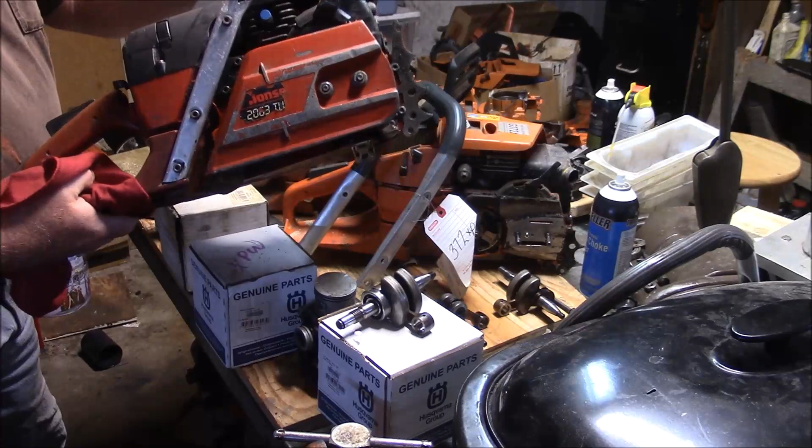I've always wanted a small mount version, and Bob provided me the holy grail of that whole 372 chassis series saw, the 2063 Jonsered. Does that sound confusing? Well, it shouldn't if you follow the channel, because you should recognize that the fundamentals of the Jonsered 70 series of saws, the 2063 through 2071 all the way up to the 2172, are all derivatives of the 372 Husqvarna designs.

Now, the second thing is I'm going to have to do this in fits and starts, because I've been quite ill for several weeks. Coming out the other end of that, I realized life can't stop, you got to continue. So this is also the beginning of my summer season with chainsaws as well.

We have a couple of themes here. One I'm not going to bellyache about, and that's the recovery. The second is reviewing the whole 372 class of saws. Now I've done this, but my God, it's spread over so many videos that it's almost impossible for people to dig through and find the relevant bits and pieces.

I may go back into the archives, because I've got photographs and videos of just about every single iteration of Husqvarna 372 and Jonsered comparable models that existed, except for two. I've got both the ones I missed here on the table today. Like I said, one was the small mount version, in this case the 2063, and the other was an original 371 in its original form.

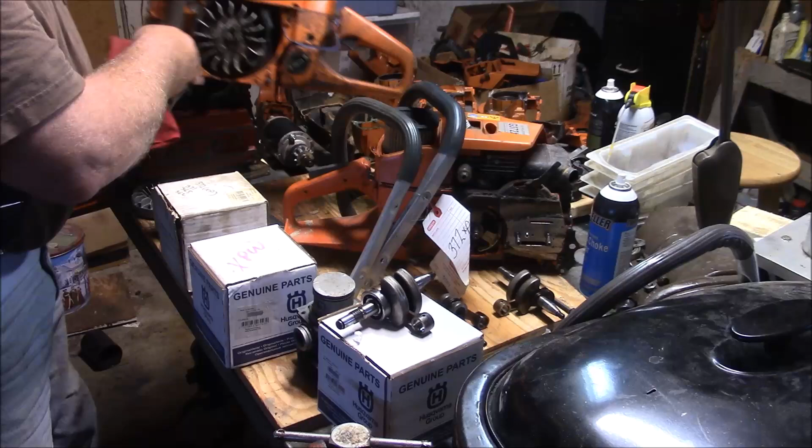Another thing that the 371 had that the 372 didn't was a single ring piston versus the double ring pistons, which came fairly quickly after. Here's a 371 piston with a single ring, and this is what the 372 had. They blended - there's some early 372s that had that single ring and all that. I'm not going to get into the serial numbers, just general concepts here. But that's a 371 single ring, and this is a 372 where they added a second ring.

I don't know if you can see some other differences from the Hilltop Saw Shop world. The observant ones will figure that out, the other ones won't. That whole 372 class saw progressed, making changes - they evolved, different ignition here, different carburetor there. One of the things that evolved also was the crankshafts, but I'll get into that a little bit later. Eventually the 372 came to an end as a US sold product somewhere around 2009, 2010.

A completely new design saw hit the marketplace, called the 372 XP. Well, wait a minute, it has the same number as the 372 XP the year before, but as I've said over and over again, it's a completely different saw design, and it's really hard to argue that they're the same saw. It was a different design pretty much from the cases up, and the heart of the new design was this basic cylinder right here, which was a completely different cylinder design than the original 372, 371 series. The differences are rather significant.

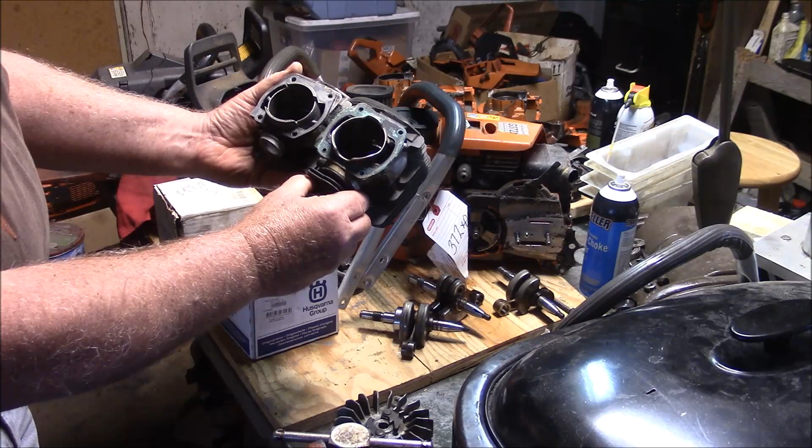Oh, I got a doctor's appointment.

Basically what you have in mind is the first group of saws above that line are original edition, and that would be the 371 that would turn into a 372 with a case change, a piston change, and a few other things like the flywheel. Details don't matter. And then that chassis spawned a 362, 365 Special, and then 372 XP, right?

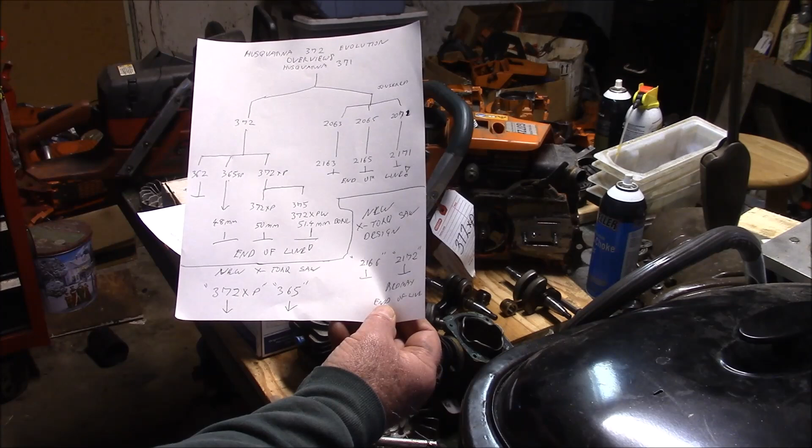And really the 362 was kind of an oddball deal. It had a small mount versus large mount cases, but it also had an open port versus a closed port cylinder. And then the 365 Special was the 48 millimeter top end that I know and love.

I did a saw on that a couple years back. Love those top ends. They're closed port, meant for a little bit lower RPM. And in the conventional logic, that means something bad. In fact, it turns out to be good.

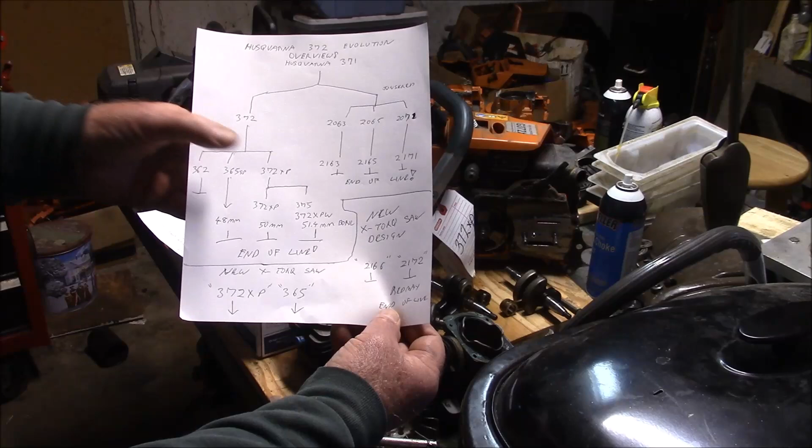And of course, the standard original edition 372 50 millimeter top end. And then they had another version. It started out being called the 375, and they quickly changed that to a 372 XPW.

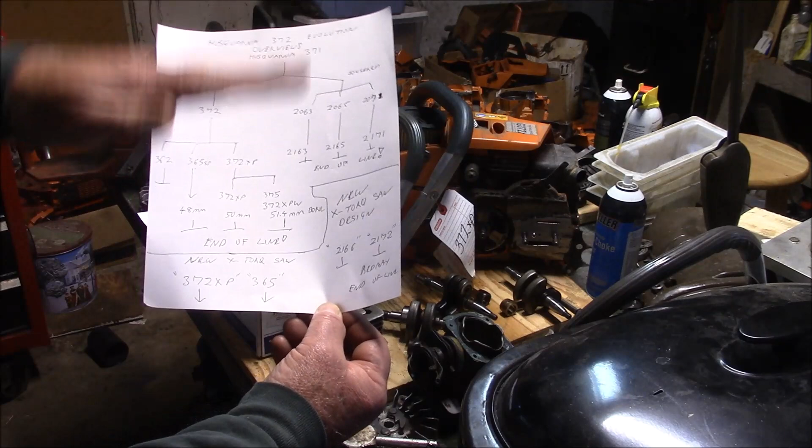Instead of 50 millimeter, it was a 51.4 millimeter bore top end, closed port, but it had restricted transfers to bring the RPMs down. And again, if you go by online logic, that's a bad thing. I've gone through that enough for you guys to realize it's not. It's just moving the power band based on the cross-sectional area of the transfers.

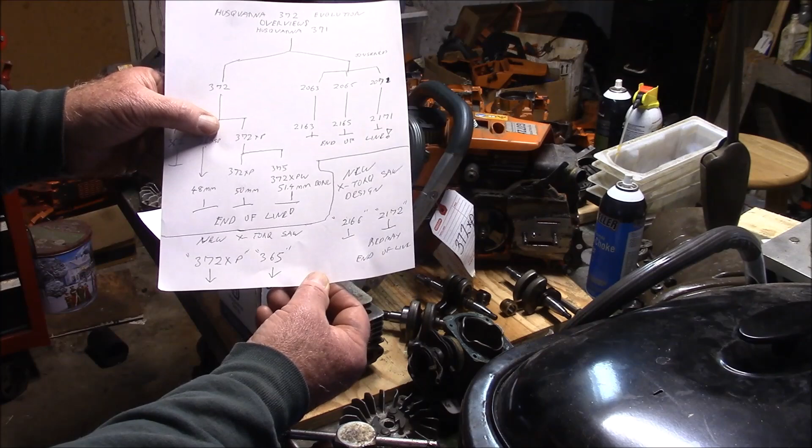Now, while the Husqvarna line laid out something like that, there were some variations. For example, there were low top versions of the 372 sold more overseas, and then there's high top versions. And of course the XPW was supposed to be for the more West Coast longer bar types—more bore, more torque, longer bar, not quite as many RPMs, but enough.

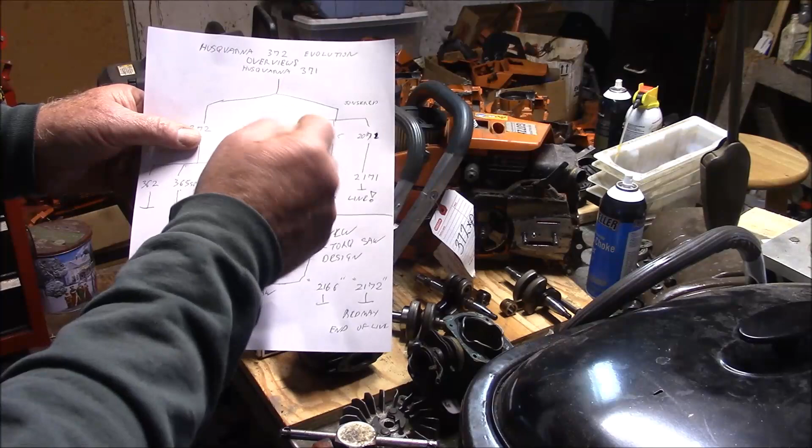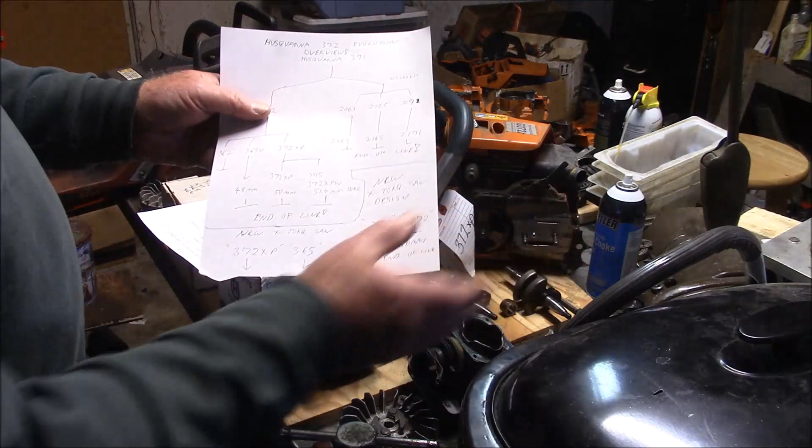But alongside the Husky line, then you had the Jonsered line, and you had the 2063, which is what this is. And like the 362, it has a little smaller bore, and I'm not sure yet if that cylinder is open or closed port, but it's different. The big difference between the 2063 and the other versions of that saw is small mount bar versus large mount bar. And of course the 2065, 2071, and that evolved into the 21 series.

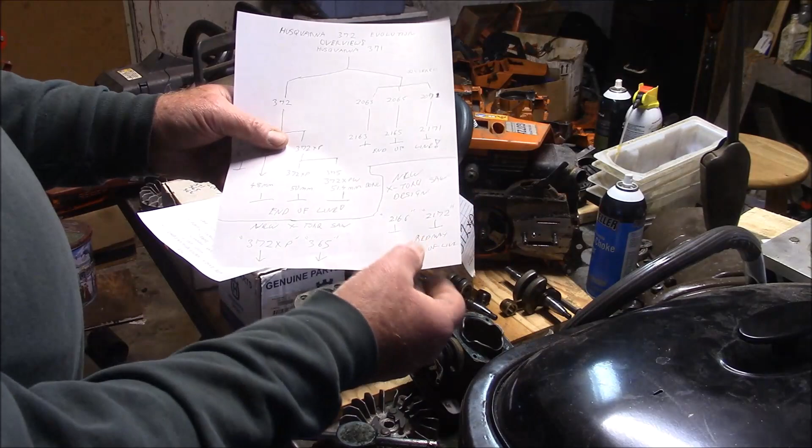And in particular, we did a 2165 on the channel, and we've done 2171s as well. For that matter, I called it a 2175 because I put a 51.4 XPW top end on a 2171 bottom end. Those were all original edition.

I'll go through this several times, and I already have. My God, I've got video after video doing that. It was just what my son pointed out—I can't go back and pinpoint them because I usually have these longer videos, and all that information is buried in there somewhere.

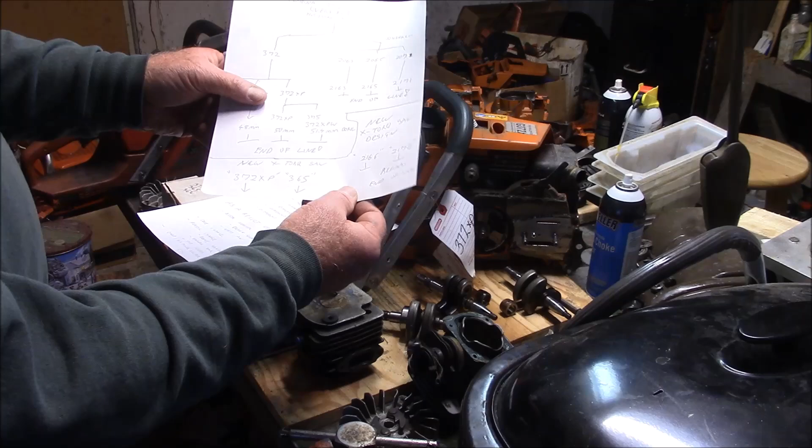So right around 2009, a new design came out. It was called the X-Torq. And as I was showing before, instead of the original edition style cylinder, you got this thing right here. It's just all different. There's a lot of parts interchangeability if you're clever, but you really have to know what you're doing.

So this is the X-Torq cylinder. It's obviously quite a bit different than the original edition 50 millimeter. It's also 50 millimeter, but it's all different, you know. You've got more fin area. It's taller by half an inch.

The location of the decomp is different. There's just all kinds of differences. And the big thing with the intake—you have a completely different casting for the intake side. You've got the strato ports, and you have a different layout for transfers. You've got caps on the cylinder versus no caps. About the only thing that's the same is the pattern on the bottom of the cylinder, so it'll sit on the cases, and the muffler.

It's about the only thing that's the same. Pretty much everything else is different with the X-Torq. So I don't really consider that the same saw. It's a different saw.

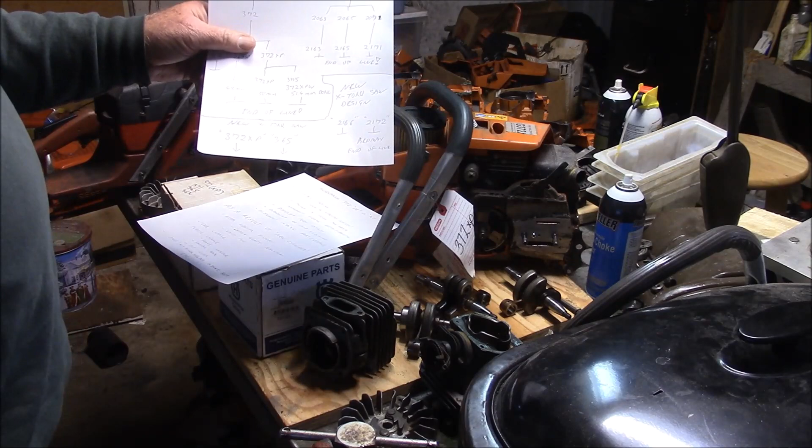Now, because this is a completely different design, really, they had to make some substantial changes. So the new design required some substantial changes. It retained the model number from the original edition saw, but it's a completely different design.

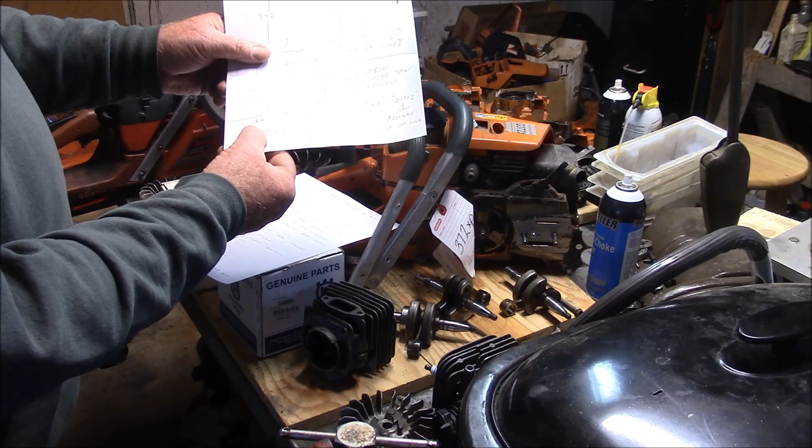And the 365, I think they dropped the special designation, they just call it a 365. But basically, these two saws are virtually identical. The only real difference between the X-Torq 365 and 372 is the cap, where they restricted the flow in the transfer port, and some plastic. Basically, the 365 is a low top configuration, where the 372 sold in the States was all high tops. Between the transfer caps being restricted and having a somewhat restricted intake because of the smaller air filter and smaller top cover, the 365 made a little bit less power. Not that many people would notice, but it does.

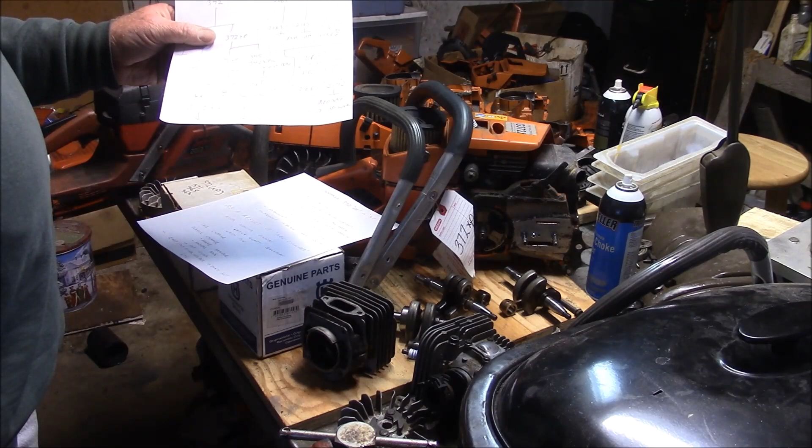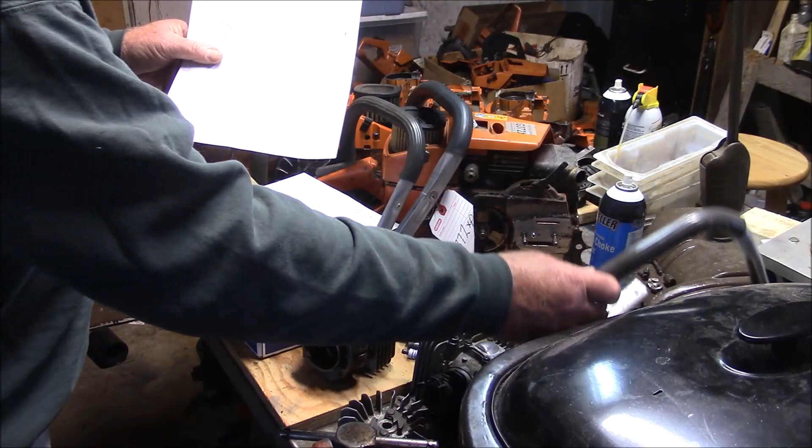Now, the Jonsereds are all low tops, so they were the same as a 365. The air filters are the same, everything else. But they had completely different plastic. I did a video on that once before. And while the cases and all the hard parts swap between the two brands, because of the pull start, the angle of the handlebar and stuff like that, things like the tank handle, the top covers and the handlebar are pretty much unique to Jonsered. They have the 2166, the 2172. Jonsered went out of business, turned to Red Max.

On the Husqvarna side, they actually came up with another set of cases, a bunch of more improvements. And then while the 372 X-Torq had a pretty rocky start, we'll get into that another time, the new ones are pretty solid. They've debugged them to the point where if you buy one of those, it's a good non-auto-tuned 70cc pro-level saw, and you won't have any problem with it. Same with the 365. So that's an overview of the models.

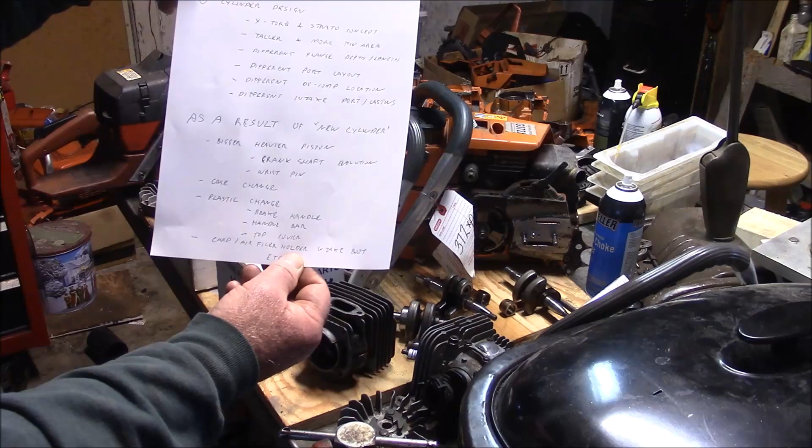Doing this because I'm getting old. Because of the cylinder design, I'm just going to show this picture up here. These are some of the differences. But because of the different cylinder design, they had to make a lot of, I think, rather substantial changes to the saw.

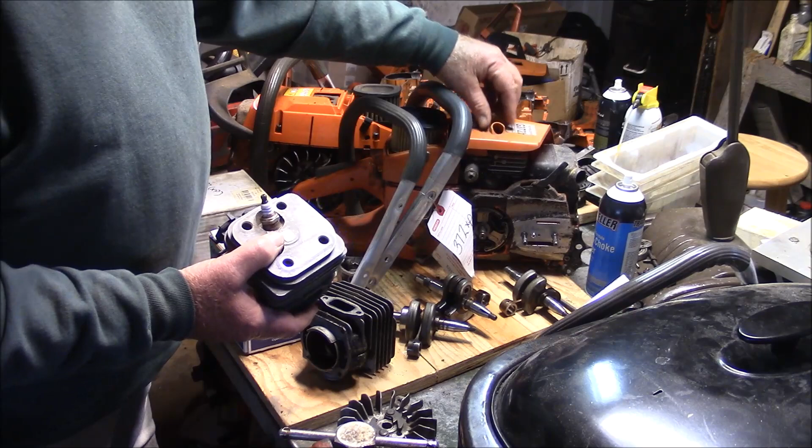Again, it's taller. So since the cylinder itself is taller, the top cover had to be changed. They added like a half inch to it. Since the decomp had this top location, they had to add this little dimple up here. So that top cover, you put it on an original edition, you got a lot more space on top of the fins. Oh, gotta go.

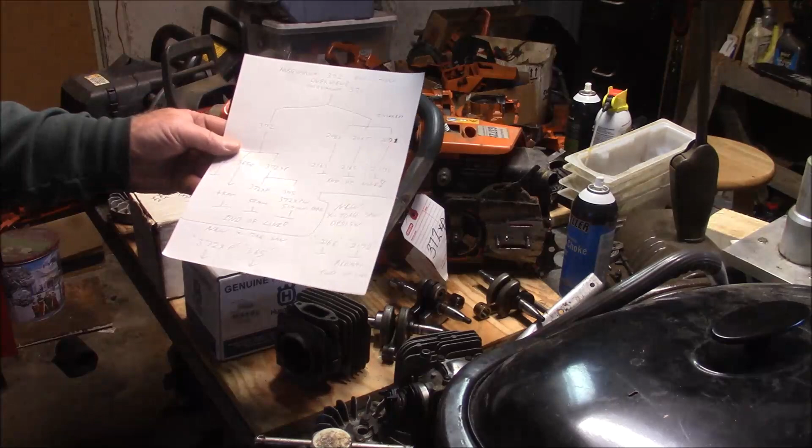So back again, and the quick overview of this is, again, the Husqvarna family tree, which started with a 371 turned 372. 372 was broken to a 362 small mount, 365 special that had low top, 48 millimeter cylinder, and a few other changes. And then the 372 XP, which had the 50 millimeter cylinder like this. This is a 50 millimeter 372. And I think I showed you before that there were some differences between 371 and 372. Things like a single ring piston on the 371 to the double ring piston 50 millimeter on 372. And then you had the XPW, which was a

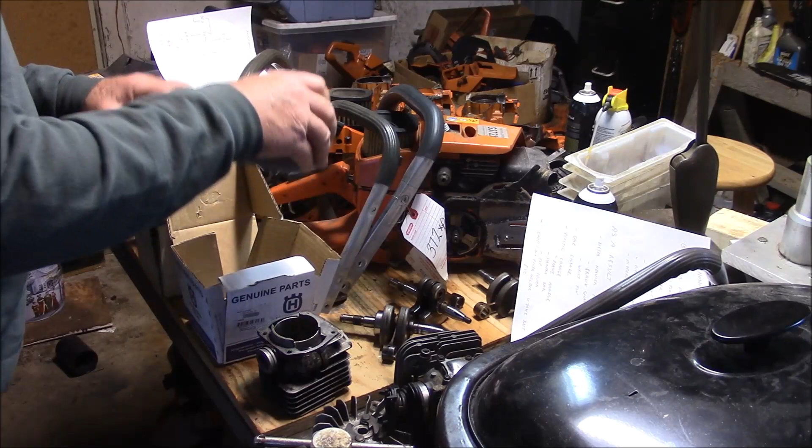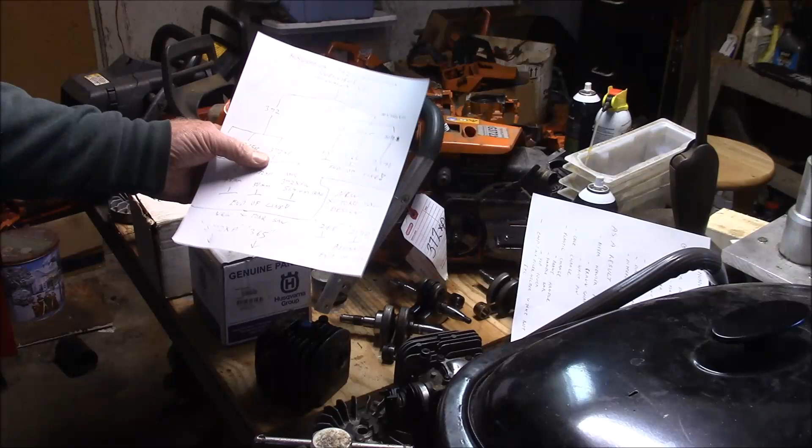51.4 millimeter cylinder with a slightly closed off transfer to bring the RPMs down. So you can see the difference in the bore and the transfers, right? So we covered that, and I've done that many times over the years in the videos. Still original edition, so I prefer them. And the other thing is the 365, I did a video on that one showing it also had smaller transfers than the 372 50 millimeter XP cylinder. This one here had the largest transfers of all of them, the original editions, and is probably the best top end to build with. For most people, starting with one of these is probably the best way to go.

And then it all changed. 2009, 2010, the original edition, both from Husqvarna and from Jonsered, came to an end. And a whole new cylinder was designed, and they didn't change the model number, so a 372 XP, most people don't realize that they have a completely different saw if they have a 2010 through now versus the original edition. They bought them, they expected the same kind of a saw, and the fact was it was a different design from the get-go. Because of the different cylinder design, there's a lot of things that got changed on the saw.

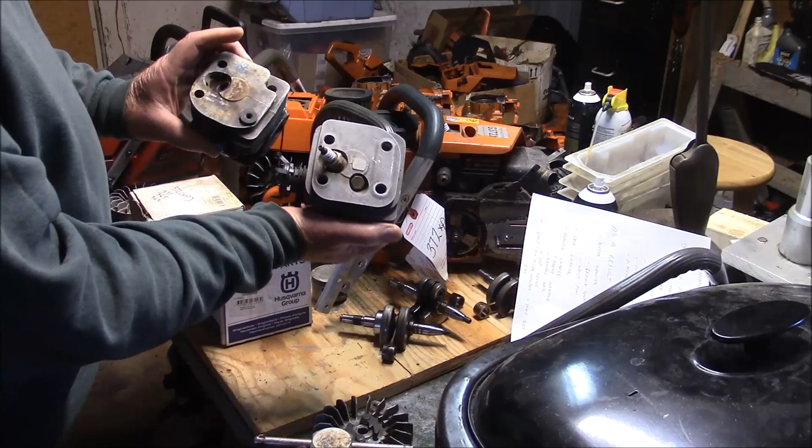It's taller. It's got more fins, so it's heavier. Completely different intake. It has additional passages for the straddle ports. And the cross-sectional area of the transfers are, I don't know, somewhat less. So they rev at a slower RPM.

One of the reasons, as an aside, that I like going the XPW top end on the X-Torq lower units, the X-Torq bottom ends, is because both of them have a little bit larger piston and both of them run a little bit lower RPM. These here, the way they're set up, they like to run around 13,000 RPMs no load. I guess the spec is 13.3. Whereas this design right here with the larger transfers is like 13,500 versus the 13,300 on the X-Torq. They just simply like to rev more. Now understand, no load is a reference for tuning, it's not time in cut. But because of this completely different cylinder, just the entire saw had to be changed in order to accommodate that design.

Everything from the cover being taller, the handle being taller, the chain brake handle being taller, all this stuff had to accommodate the taller cylinder. And while you could retro a lot of the X-Torq parts back to the original edition, there are certain things on the original edition you can't retro forward to the X-Torqs. One very subtle thing is when they went to X-Torq, they had to change the casting of the cases right here because this flange is longer on the X-Torq than on the original edition by quite a bit. I don't know if the camera will show, but you're looking at 100 thousandths or more. So while you can put the original edition cylinder on the newer X-Torq cases, you really can't put these on the original edition cases unless you take back some of this material to make clearance so it can sit inside the case.

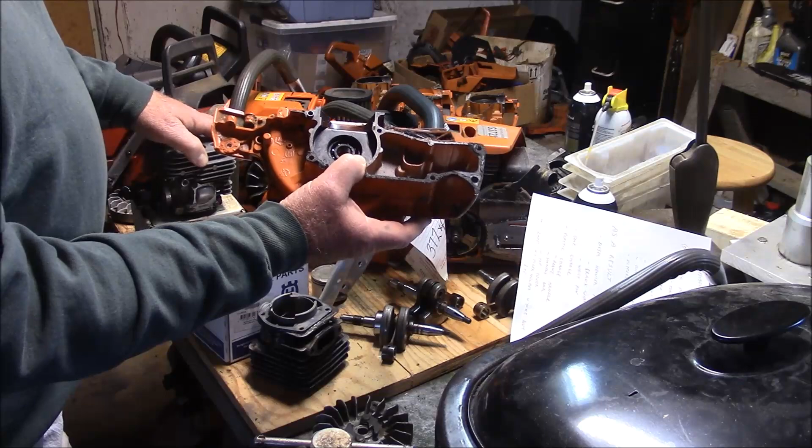Because otherwise the flange will interfere with the bottom here on the original edition cases. So the cases are different between the original edition saws and the X-Torq saws. Although if you buy a set of cases for original edition saws now, you're going to get the X-Torq cases because they retro back. So that's a very subtle thing.

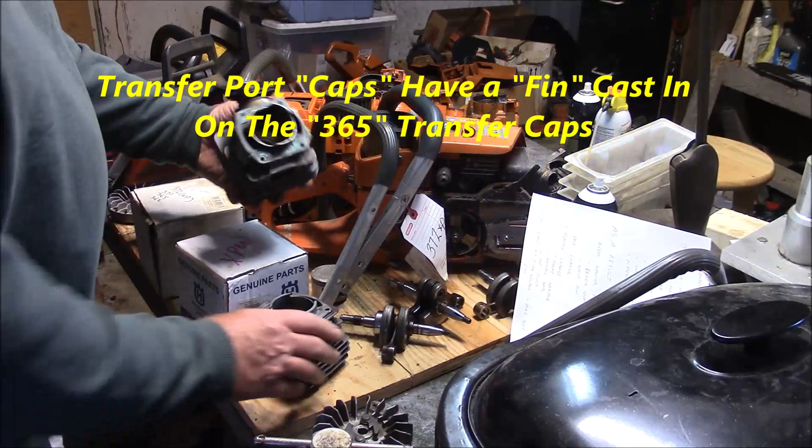And the discussion can go in a million different ways. I already mentioned the difference between the 372 and the 365 is the transfer ports, high top versus low top, and stuff like that. But there are a lot of other things that happened with this design change that's not readily obvious. We talked about the top cover, the handle, the chain brake, and all the things related to the intake, because it's a different carburetor intake boot, filter holder, and things like that.

But we didn't talk about the crankshaft. One of the things Husqvarna had to deal with is the fact that with a new cylinder, you have a heavier piston. So now the entire balance of the crank and bottom end is different because you have more weight sitting right here. And some of the earlier X-Torques had that PTO side bearing issue.

Some of it was related simply to people revving them high, trying to make them sound like the older versions. And no matter what you did to the tuning screw, you could never make the X-Torques rev as high as the standard 372 XP original edition. Just simply couldn't do it. Number one, because the ignition systems on the X-Torques were rev limited to 13.3, where the ignition systems on the original edition were 13.5 or higher. So that sound was going to be different simply because the RPMs were going to be different.

As an aside, one of the things that used to create problems for dealers was a person who got the adjustment tool for the carburetor and would keep trying to lean out the X-Torques to make it spin like an original edition. Eventually that creates problems, you know? We found pretty much early on that if you set these to about 13,000 RPMs no load, the X-Torques, even the early ones, lasted pretty well if you brought the RPMs down. I think it was a variety of factors, but one of the key issues is just having that additional mass as a piston beating on the bottom end.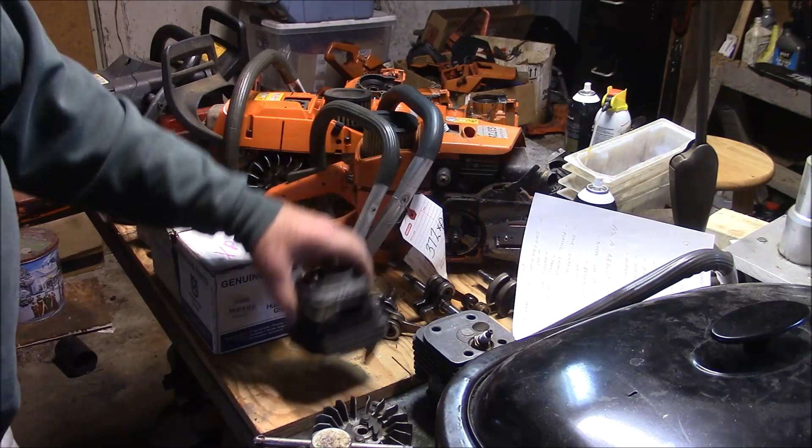So, was it an improvement? I don't know. They do run good, no doubt.

I would say that the X-Torque is a great way to start if you want to modify saws, because you've got the caps. Remember, you have caps that you can take off, whereas the old ones here, you had to get a fairly sophisticated die grinder to get in there on those transfer ports, where this right here you can just work right from the sides. So these, I think, are easier to modify.

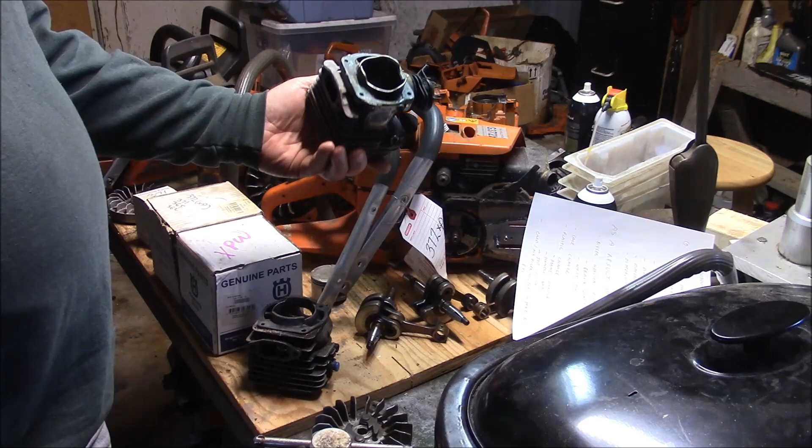And like them or not, these damn things can run. Do the right kind of things to these, they just freaking run.

So that's an overview of the lineage, the models, an overview between original edition and X-Torque.

We're going to do that several times in several different ways. And as I get into future videos, I'm going to drill down on things like the differences in the crankshafts and the differences in the cases. In fact, I've done that in the past. Suffice to say that these are what they sell now, number one.

There's a gazillion of them out there, number two. There's an awful lot of people who got rid of these top ends for original edition top ends when you did conversions, and that created a whole new set of problems, by the way. So these are a little bit easier to work with, I think.

By the way, one of the issues I've seen a gazillion times: one of the things that happens is you put an original edition cylinder in place of one of these. There's a lot of space underneath that top cover now. The cooling is not quite as good because the air just goes right over the top as compared to being forced through the fins. And there's less fins to begin with.

So in the northern climates it doesn't matter so much. In the southern climates you might want to think about that twice.

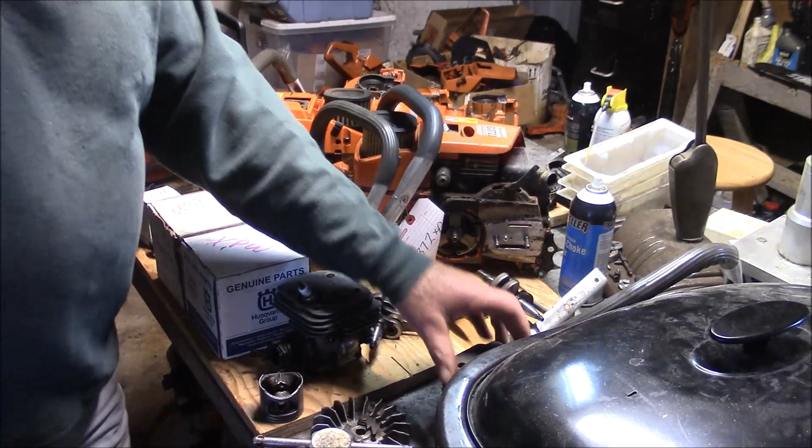One of the modifications I like to do on these is modify the intake boot and put an X-Torque carburetor on it. I've done that a bunch of times, you've seen it in the videos. It actually works. You've got to sort of clean up the intake port and cut that, like I said before. So there's just a lot of really simple things a person can do to make those run stronger if you want to.

Not going to get into that. I've covered most of what I want to do, but to those guys who are going to make them spin, there's a few of you guys out there who are discovering the 372 for the first time, it sounds like, on the videos. I'm going to caution you.

Careful with the crank. Pick the right crank. Learn a little bit about what's out there, and absolutely avoid the aftermarket cranks. Make sure that you get one of the later cranks.

You can see right here the slight changes. Get one of the later 372 X-Torq cranks if you're going to modify an X-Torq cylinder to make it run more RPMs. You want to really pay attention to that balance.

If you're starting with a later model saw, like 2016, '17 and later, it's a non-issue. But if you got one of the earlier X-Torques, like the 2010 through '14, you might want to consider finding a late model crank, used or new. I think you'll find that's going to serve you better, especially if you put on an unlimited ignition and start trying to get higher RPMs out of your saw.

Now, along with all this stuff, one of the big differences between the X-Torques and the older saws is the ignition system, and this is something that's overlooked. The first generation of those saws had troubles, they had a hard time getting them started. And they came up with an ignition system, I don't know, somewhere around 2016 or '17, where it actually started creating spark at a much lower RPM, plus a slightly different timing curve.

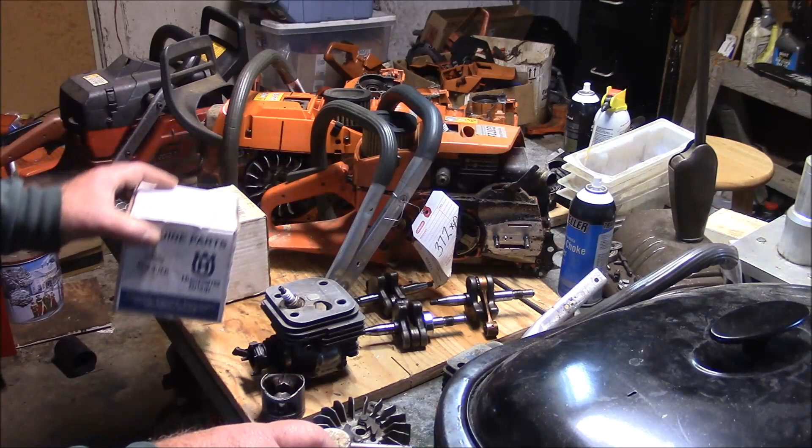If I'm going to go back to an original edition and I don't want to make major changes to a saw, and I've got a late model X-Torq, these cylinders, the XPWs and the 48 millimeters, like I did a couple years back, they really suit the chassis because of that ignition system, and also because this one here also has a little bit larger piston, so it balances well on the X-Torq crank.

And in the wrist pin and stuff like that, it's a nice balance, and the cylinder, because of the smaller cross-sectional area of the transfers, matches up really nice to the ignition system.

Now, the real horsepower guys don't care about that, but the rest of us do. So you can bring one of the X-Torques back to original edition and end up with a nice running saw. And I would get rid of the cover. There's a lot of options out there, either Chinese or used OEM, to bring that cover down so you don't lose the cooling capability. You want to force the air through the fins instead of having it go over the top. Stuff like that you've got to consider.

Now I'm getting off into the weeds, getting new parts to go on the original edition saws. I don't have a problem having the taller handle on the original edition 372. That works fine. The only part I really have a problem with is the top cover, like I said, because of the clearance over the cylinder for cooling. Pretty much everything else is fine - a little taller chain brake paddle, who cares? A taller handle gives me more room when I have a glove on. Actually, it's not a bad thing.

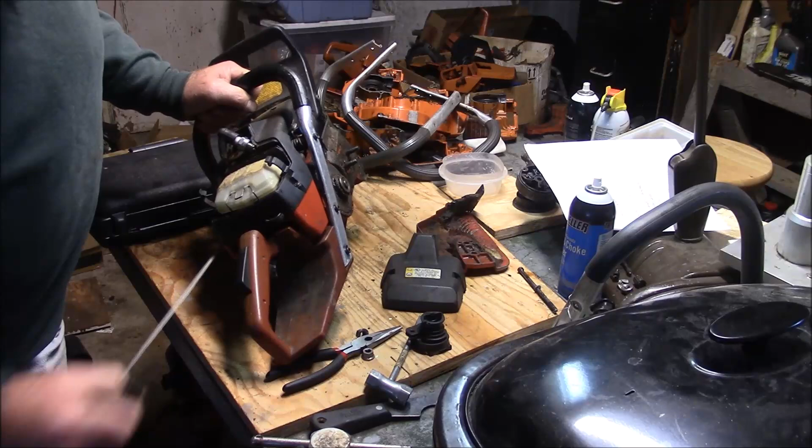Let's find out whether or not we have a saw that we can turn into a running saw right here. This was given to me by Bob - this is to fill a hole in my collection. This is a small mount 2063 Jonsered. But the first thing I need to know is, does it have spark? Isn't that a good start? Let's see if we have spark. We do have spark. The next thing is, do we have compression?

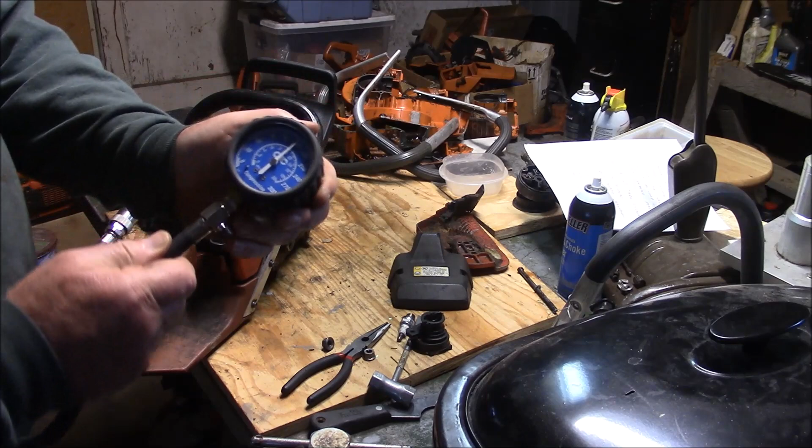Look at that, we got up around 150. I don't know if the camera will pick that up, but I measured 150 pounds of compression plus spark.

Why won't this saw run? I think it's going to run. So the next thing we need to do is, you got compression and spark. We need air, which goes to this air filter, and then we need gas. So there needs to be some in the tank. Alright, got a little bit of gas in there.

Now, to those people who don't like primer bulbs, boo on you, because this is where the primer bulb would make a big difference, because by priming that you could make sure the gas is into the carburetor. Guaranteed that thing is dry as a bone in there, and even while I choke it, the chances of me being able to draw gas up and get that wet fast is probably pretty slim.

So let me see if I got a few drips left to go right into the carburetor. Yeah, there's some. We'll see if that helps to get started. Maybe enough RPMs it'll maybe start drawing. So let's see if we have a saw. Come over here and decomp, because I'm old. Probably don't need that much gas in there, but maybe we do. Fired.

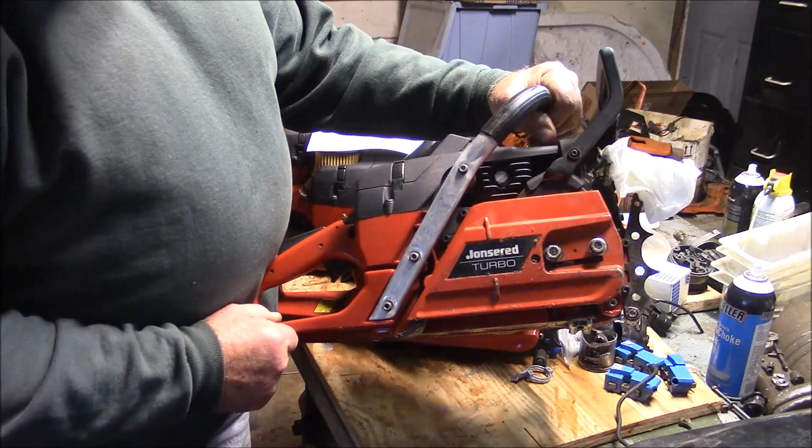So let me see. See if my little... yeah, you know, 372, 370... Oh yep, Jonsered. What we have here is a 2171. Looks pretty much like the other ones, doesn't it? This one here, I call it a 2175 because it has the Husqvarna XPW top end on it. It's a 51.4 millimeter versus the standard 50 millimeter.

And it has a different ignition. Can't you see it? Should be clear as day. We'll get into that. But this one has the later version of the ignition system that are on the new X-Torques, and it starts a lot better once I made that modification. Other than that, this is a relatively unmodified saw. It just simply has the 51.4 millimeter top end, but it has a standard carburetor, muffler, X-Torque ignition, but the rest of it is pretty, you know, pretty generic.

This is a stock 2172. And remember we were talking about the differences between the X-Torque saws and the original edition. Well, you can see it right here if you look careful. See how much taller that chain brake is versus the original edition? Same with the handle, same with the top cover. You know, there's a little more space right here, a little taller. And notice it has a decomp up here because of that different cylinder design as well.

So this one here is also relatively stock, in the sense that the only change I made on this is I popped out those goofy nylon bearings and stuck in steel cage, and I put it together with a glue gasket versus a standard gasket. Other than that, this is stock. Good running saw. You've seen it many times in the video.

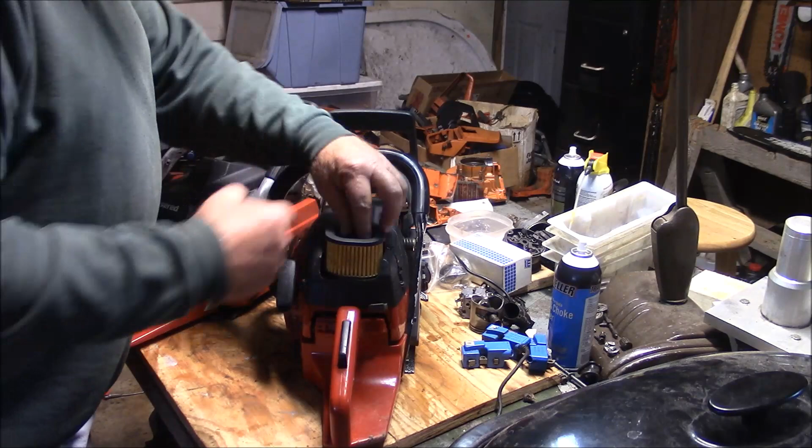But this is a case of blending the later X-Torque parts back to an original edition and coming up with something that's a blend of both that's better than either one, in my humble opinion.

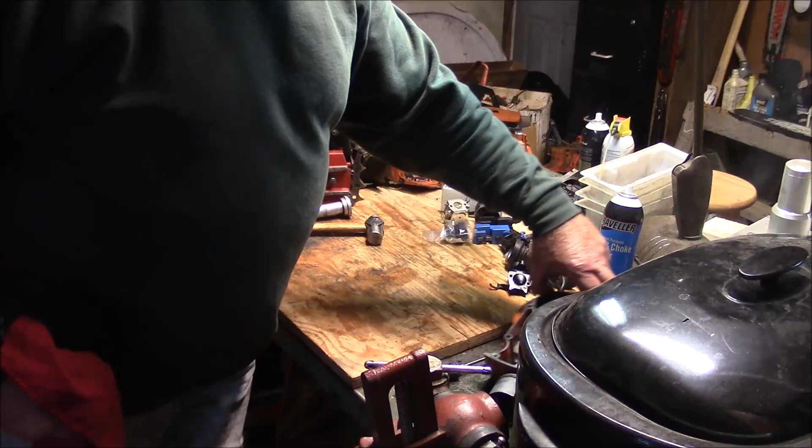You might ask how come I'm going back and reviewing all this stuff. Well, I kind of had a rude wake-up call a little while back when my son came home and basically told me that all my videos suck. So I went back and started reflecting on that a little bit, and then realized that while I was doing a whole bunch of these videos about just living life, I really never put a whole lot of thought into going back and referencing those. I figured it was just sort of rambling through life and you kind of ramble on through. But God help you if you want to go back and actually find how to do anything, because there's nothing in the titles that gives you a freaking clue.

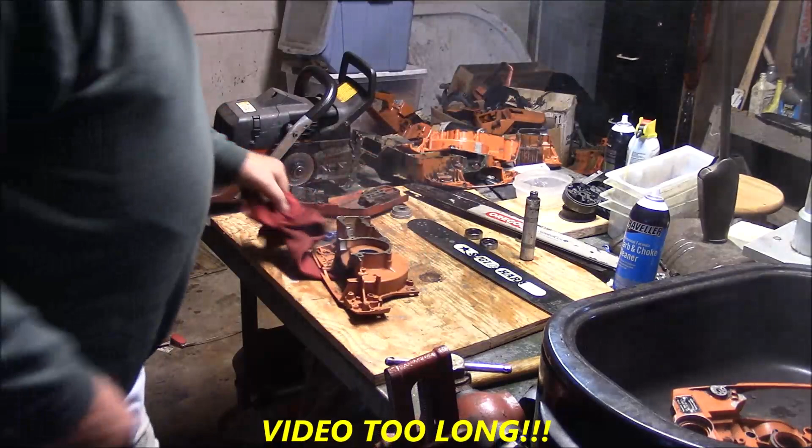So they're probably pretty close. That's how I put my bearings in, just like that. There's one. There's two.